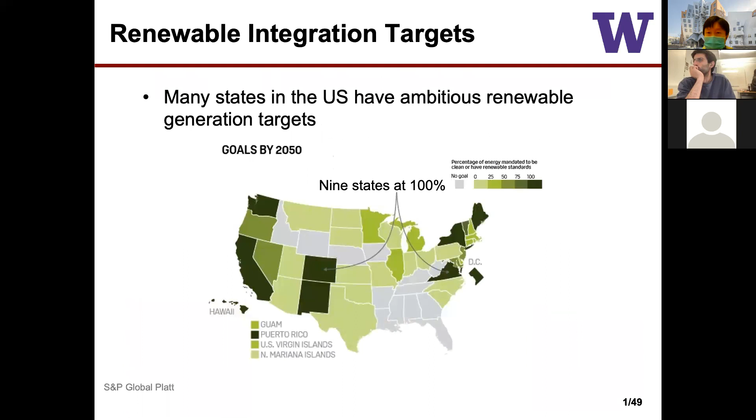Today I'll talk about learning for energy systems, especially safe learning for energy systems. This work is with my students here. As many people in this room and listening on Zoom know, we have pretty ambitious goals about renewable integration.

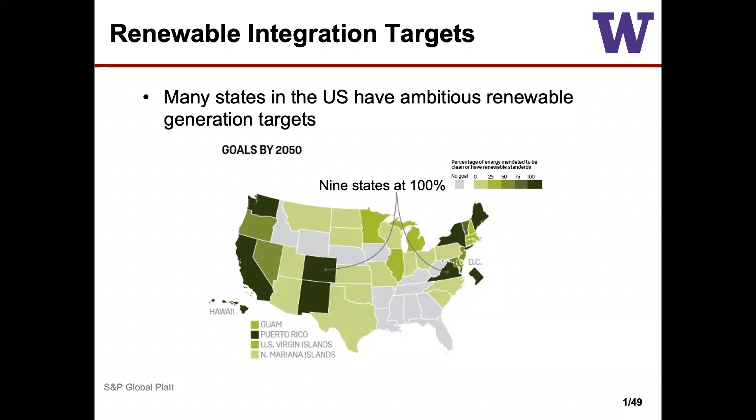Many states are targeting a very large amount of renewable portfolio by 2050, with some trying to get to 100%. To integrate these renewables, we're going from a system with little renewables and a lot of traditional synchronous machines, to a system with much more renewables connected by inverters.

Through the talk, we'll contrast generator-dominant systems versus inverter-dominant systems. The system with more inverters is much cleaner and more sustainable, replacing carbon-intensive generation. But the challenge is that although the generator-dominant system is not very clean, it is easier to control.

For conventional systems, you have about a few hundred generators to worry about, with fairly large mechanical and rotating inertia, so you don't have that many things to think about. Whereas when you move to an inverter-dominant system, you go from a few hundred generators to millions of things you have to think about, and each of them is much smaller. So from a control and stability point of view, it's quite a bit more challenging.

The good thing about working with an inverter-dominant grid is that it gives you a lot of control capability. Inverters, being power electronic devices, give us a lot of possibilities to control their behavior, whereas synchronous generators are typically much slower and there's not much you can do to control them. With inverters, there's a lot you can do.

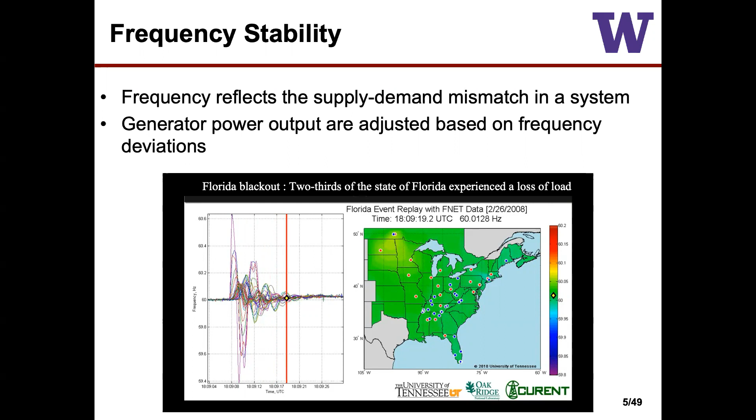If you read FERC's order, it basically says well, if you're renewable, you must provide frequency response. If you want to integrate with the grid, you cannot just act like a load, or a negative load. You have to participate in frequency response if you're an inverter-based device. So the question becomes, how should you participate? FERC tells you that you must provide it, but FERC doesn't tell you how to do it. So we're interested in, if you're an inverter, how should you participate?

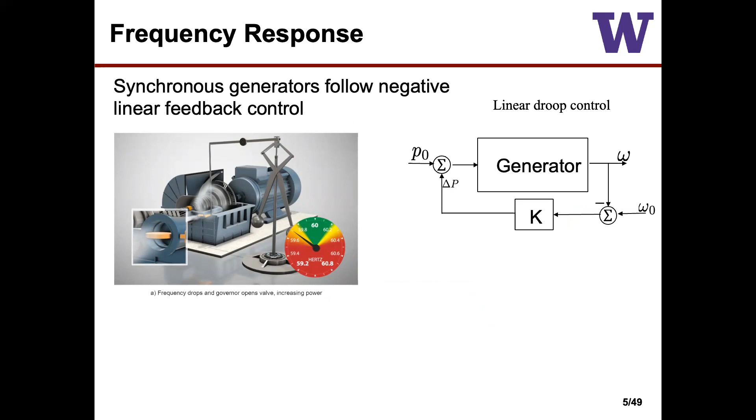For traditional synchronous generators, this is not a big problem. This is a problem that was well studied. What they do is they follow negative linear feedback. You measure your frequency deviation, you go through a linear gain, and you adjust the power output according to the frequency you measure. You control this kind of linear slope. You do a linear droop if you're a synchronous generator.

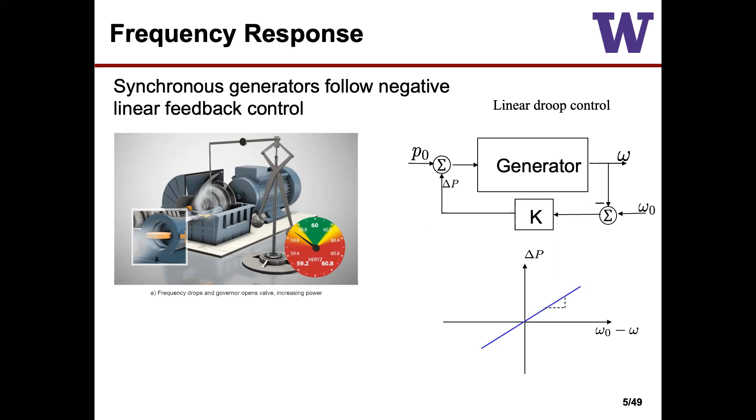Now what do you do if you're an inverter? You don't have this kind of spinning machine anymore. What you do is you have electronics switching at very high frequencies. And if you're told to respond, how should you respond? Whereas for a conventional generator you're quite limited in this control, for inverters there's almost arbitrary choices you can do. You can measure frequency and respond however you want. So this is now a design problem of what response you should put here.

So far, what we've been doing is we look at this and say, well, we know how synchronous generators work, so let's just mimic a synchronous generator. I can do anything I want, so how about I mimic a synchronous generator? Well, is that optimal? Can we do better? This is as if you have a smartphone and you're being asked what do you want to do, and you say, I just want to make calls. So if you have this design capability, can you do something better than a synchronous generator? That's our question. I don't know what curve I should have here. I can do a linear curve, but maybe I can do some other curve that's slightly better, that has better performance.

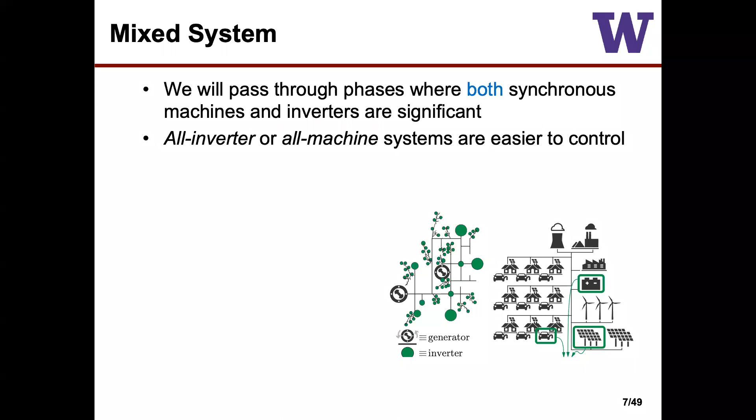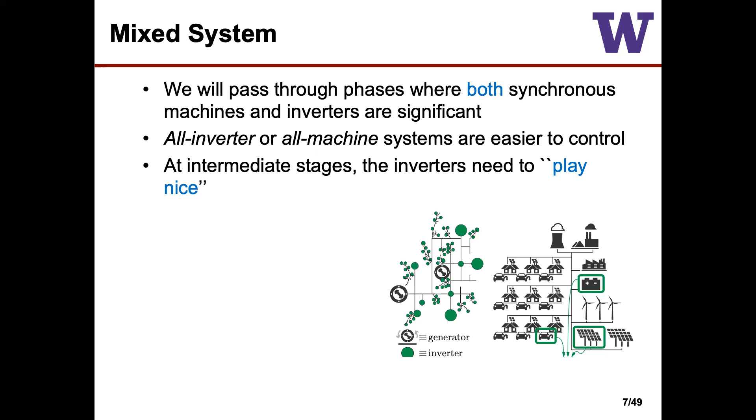One thing to remember is anything you design, the inverters have to play nice with synchronous machines. You cannot assume your system will suddenly go from no renewables to 100% renewables. We have to go through a phase where both are significant. It turns out if you assume everything is inverters, it's easier to control, because you have full design capability. So here, what we want is we want the inverters to play nice. You still have synchronous machines, you have to respect their dynamics. At the same time, you want to design your own feedback to be more optimal in this mixed system. When we talk about systems, think of 50-50%, half inverters, half synchronous machines. So you cannot say there's no constraint. There's still constraints. This kind of system still puts a type of constraint on the controllers you can adopt.

To do this kind of design, we're facing a bunch of challenges. The challenge is, if you're an inverter, you only get your local measurement, you measure your local frequency. There's no explicit communication within the system. You want to control a system that has nonlinear dynamics, we're focused on power flow equations, which are nonlinear equations. So we're doing local control of nonlinear systems. And then what do you want? You want your control effort to be relatively small. You have an inverter with limited power output and limited energy, so you want your control effort to be small, and you also want your frequency deviation to be small. So you're basically trading off control effort versus making the frequency deviation small, and making sure the system eventually converges to equilibrium.

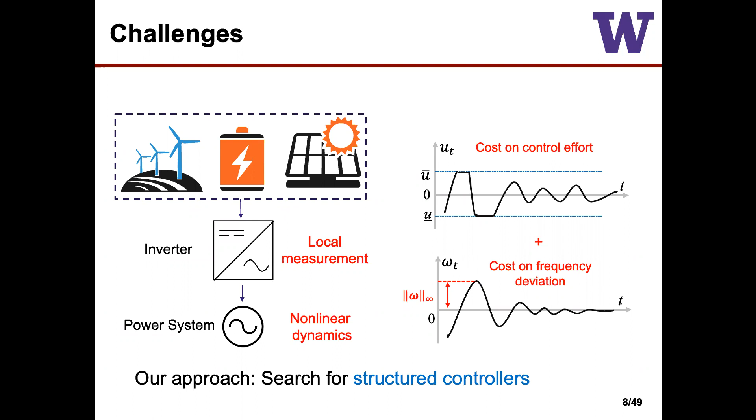Our approach is we want to optimize the controller. We're going to search for structured controllers, the right type of control function we should have on the inverters themselves.

So the outline: we'll talk about how you systematically think about finding the controller. We're going to do learning, but how should you think about which kind of controller to run? What we want is to guarantee system stability. We don't want to trade off optimality versus stability - the system should be stable. Then we can optimize performance on top of that.

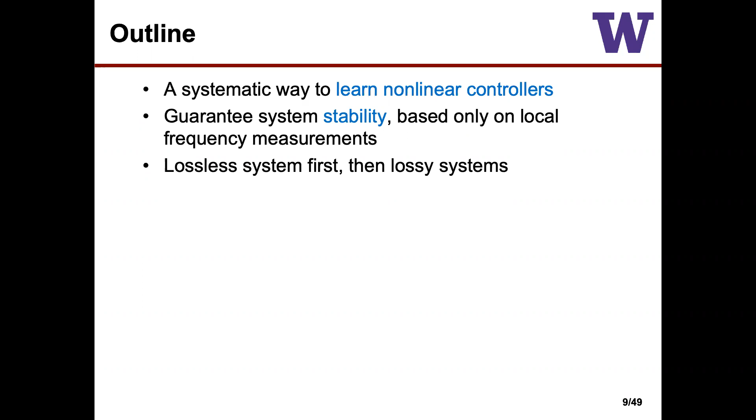So we'll do a lossless system first, then we'll look at the lossy system for simplicity. By lossless, if you look at this power flow equation, we'll assume that B is much larger than G, the standard assumption, and then we have only the sine term left over. So we'll first start with this lossless power flow equation, then circle back to the more full AC power flow equation to look at how stability and learning interface with each other.

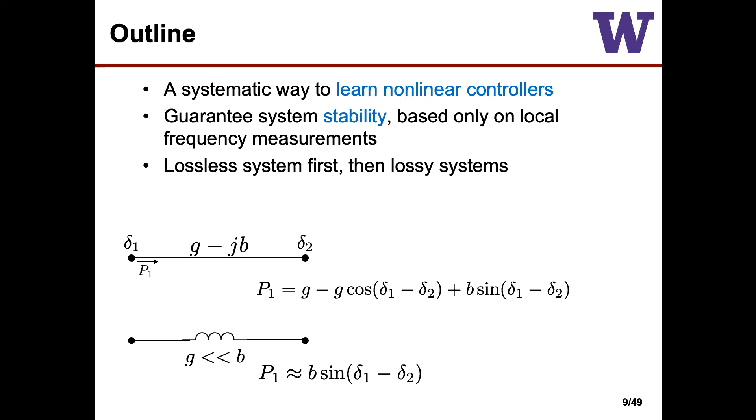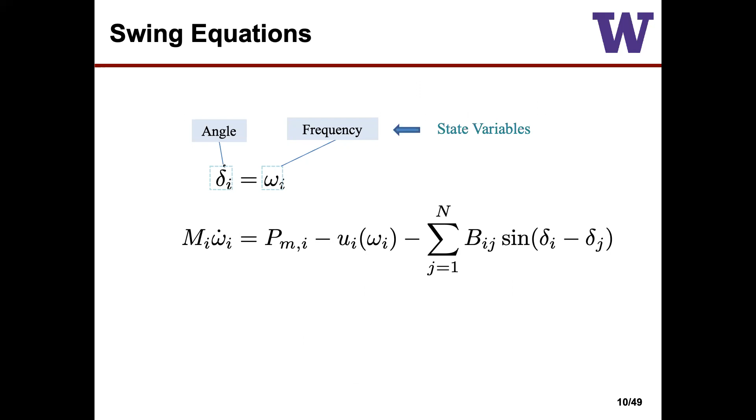I'm sure folks here have pretty much all seen this power flow equation. Just for notation, we have an angle and frequency - the time derivative of the angle is frequency. This is the swing equation: we have some inertia, some power injection, this is power flow, and our goal is to design this controller U.

Think of you're an inverter: you measure your frequency, your local frequency, and you have some feedback to power. So this function U is something you want to design.

So local frequency - they're on the grid side. Think of PLL, phase lock loop, measuring the grid side frequency.

So if you talk about linear droop design, you basically have this as a linear function. When you talk about inverters, the question you ask is, can it be some other function? I don't want linear functions, I want this to be a better function. So what is your goal? How do you measure better or worse? How do you think about optimality for this kind of function?

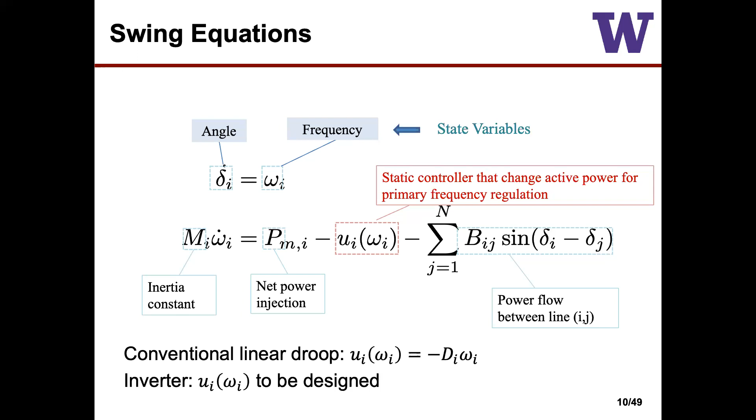The way to look at this, we have things on a graph - some are inverters, some are traditional synchronous machines. They're all linked by this nonlinear power flow. And you want two things to happen: you want all this frequency to synchronize, let's say to 60 Hertz for the US grid, and you want to minimize the control effort you have on this.

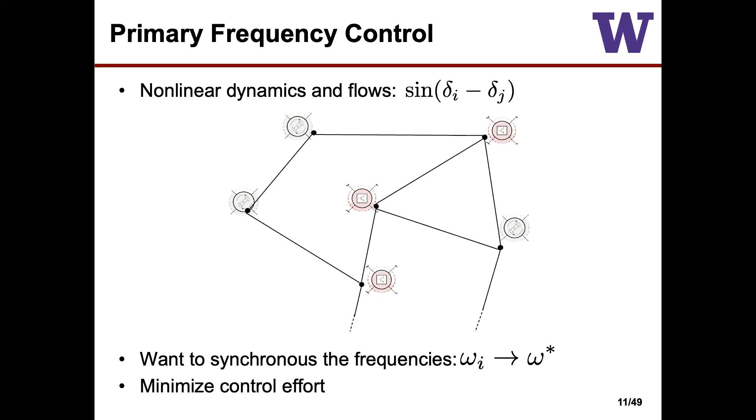So optimality will be measured in terms of a trade-off: I want to minimize the frequency deviation from the nominal setting, plus the control effort. This is a sum between the infinity norm on frequency and the two norm on control effort. Anything that minimizes a weighted sum of these two terms we think is optimal - optimal means this is small and this is small, those two costs are small.

Sorry, should we ask questions? Yeah, you can ask questions. Yeah, go ahead.

Why do you consider that your frequency will converge to the nominal value? This is a discussion I had with Maria - after it was understood, this is a problem of primary frequency control. After that, let's say in the Nordics or in European countries, frequency settles to a steady state which is different from the nominal value.

So in that case, your second norm requires you to carefully design which time frame you choose, because you have steady state frequency variation—it doesn't go to the nominal value. So here you assume that your inverter also plays a role of secondary control and puts back the frequency. Yes, we'll restore the frequency. So basically you are doing two functions: reducing the instantaneous frequency deviation, which is the infinite norm in your case, and putting the frequency back. Yeah, all this process.

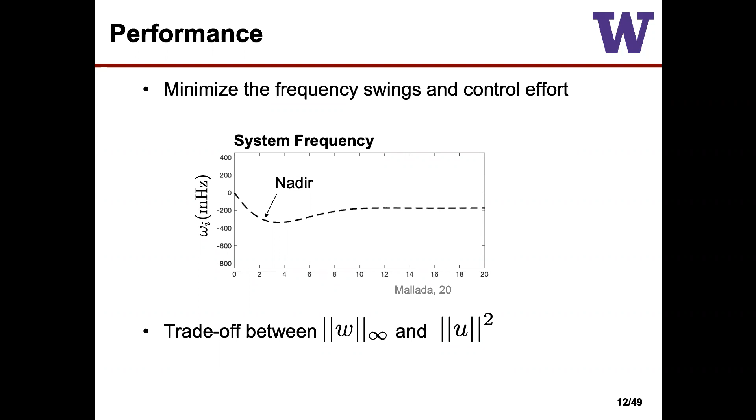Second norm is a good cost if you think about storage—this measures the energy extracted from storage, so you can use second norm. There are better functions, and the thing I want to say is we don't need this to be second norm. Think of this as an example; you can put in whatever function you want for the controller here. We don't require convexity on this cost function actually. There's one nice thing about learning: we don't need this to be convex. So if there's a cost function that's more economic, that makes more economic sense, you can put in that cost function. Think of this as an example, because this is sort of the traditional thing people do in control. But it's a good question—you can replace this with some other function if you want.

So this problem is about optimizing over all static feedback controllers U. This problem is as non-convex as you want it to be—there's nothing convex about it if you want to optimize over U. So it doesn't matter what your cost is; you can put in non-convex cost for this. Even if you restrict U to be a linear function, it's still not convex. Even if you want to say, I want to search over the best linear controllers, it's still a hard problem to do—there's no good way to search over linear controllers. And if you want nonlinear controllers, this is a very hard problem to search over.

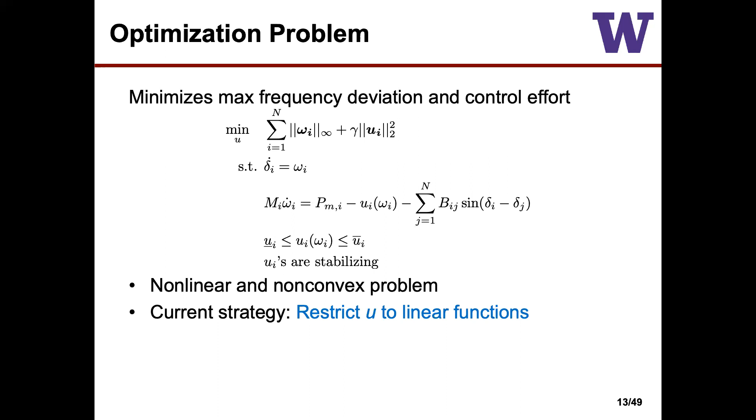So right now, if you look at our approach: okay, let's try learning. I don't know how to search over this, but I do have this problem I can write down, I do know the physical equations, I can simulate this thing forward. So let me just do learning and see if learning learns a reasonable controller for me. Let's just try this and see what happens.

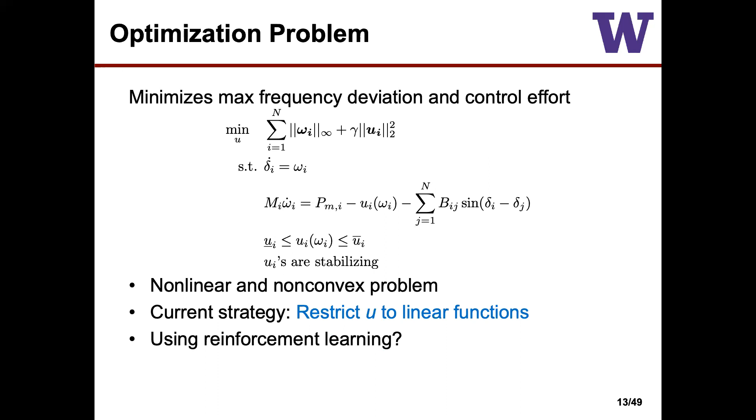All right, so in our work we'll also do learning. But the key thing of the learning we want to do is we want to guarantee the learned controller is stable, so it doesn't blow up the system. We want to guarantee that this learned controller is robust to system topology changes, so you cannot assume you know everything about the system, like the exact equilibrium. We want to make it fairly robust. It turns out you can do this if you look at things like Lyapunov functions and passivity. The rest of the talk will walk through how to look at stability from Lyapunov functions and passivity to come up with the right class of neural network-based controllers—what is the right class you should search over when you do learning.

But before doing this, we can ask the question: do we need any of this math? Do I really need to look at Lyapunov functions? Why not just try the simplest things I can do?

Parameterize things, control as a neural network, run RL. Let's see what happens in this case. So I know the power system, I can do time domain simulations, and I can update the weights of this neural network controller using very standard algorithms.

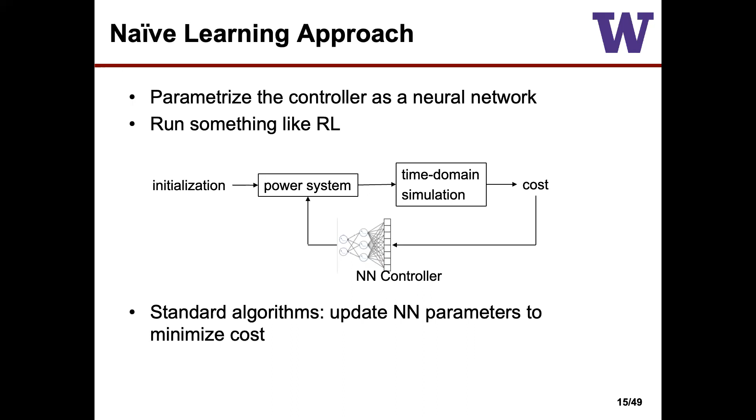You can code this thing up in like a week or so and see what happens. You try 39 bus, you run this, and you say, hey, this is pretty good, actually. My best neural network controller is a lot better than the best linear one I have. I do a lot better in training, so you're very happy with this performance.

But the bad thing is, you can put this into testing and you get some controller like this. Who knows why this thing makes sense? But I'll tell you, this is the best one I can get. Okay, so let's see what happens during testing.

That's the biggest difference between testing and training you can see. This thing does not generalize at all. You can train all you want, the training performance is quite good, but when you actually put it in the system and do testing, this is where the system blows up. So that's why stability is important.

Because the system is not linear, it's very large, and whenever doing learning you only look at a finite number of trajectories. So there will be some perturbation that kicks your system in the wrong way, and it blows up, and you try to convince any system operator to use your controller. Just look at this, and they will never use your controller. So naive learning is not very good. You don't want to naively learn any controller you want.

Sorry? Oh, so there's a lot of buses, so they're just coding different buses in the system. Yeah, generators, right? So some are blowing up, some are not blowing up. That's for weird behaviors in the system.

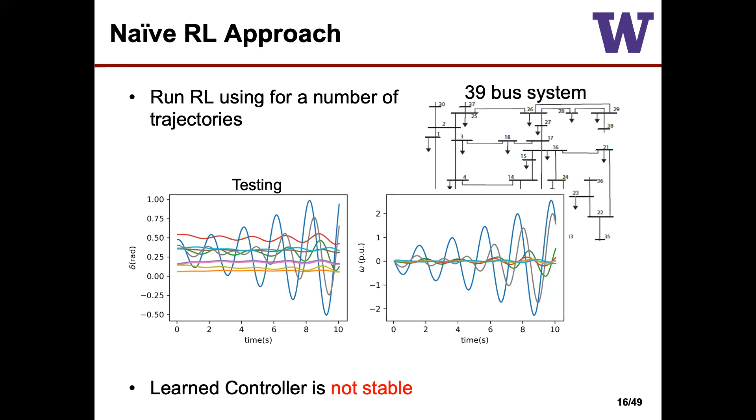Right, this is unstable behavior. So if you look at this idea, you cannot search over all controllers. What RL does is let you search over every possible network. You really want to search over the controllers that do two things: one, I need to have an equilibrium at the end of the day, and I should converge to equilibrium. That's what a stable controller means. Those two conditions should be satisfied when you learn your controller.

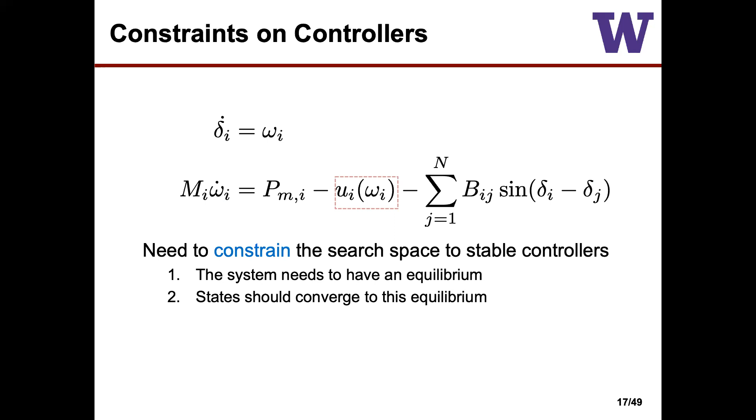So the question is, how do you make these two statements into an algebraic constraint I can put on this? Okay, so that's our goal. How do you get a computer to enforce these two things for you?

So if you look at this optimization problem, the question is, I have this constraint - you should be stabilizing. What do you do for the network? Because our goal is to put this sort of very global and general constraint into something with algebraic equations which I can work with. I can constrain the controller to satisfy that constraint. So how do we do that?

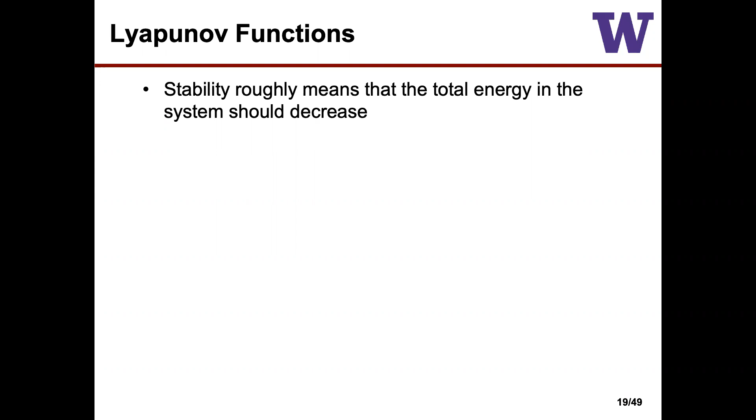Well, so this is where we have to look at Lyapunov functions. It's a nonlinear system, so let's first look at Lyapunov functions. Lyapunov functions measure the stability of the system by looking at the energy functions in the system. And very quickly, you have a dynamical system.

You want a function V - think of this as energy. You want this to be positive when you're not at equilibrium, and you want the derivative to be smaller than zero - you want it to decrease. This means you want to dissipate energy until you get to the equilibrium, then you stay at equilibrium. So if you have this function, the system is stable. Right, if this thing exists, everything goes to equilibrium - there's nowhere for the energy to go.

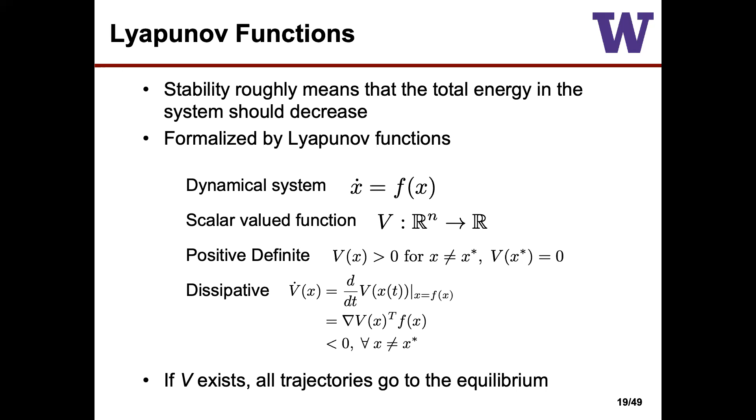Of course, the theory is nice. The question I always ask is, how do you find this Lyapunov function? For linear systems, it's not too bad—you can find a Lyapunov function by solving a convex problem. For nonlinear systems, you're basically on your own. This is a very hard problem typically, searching for a Lyapunov function.

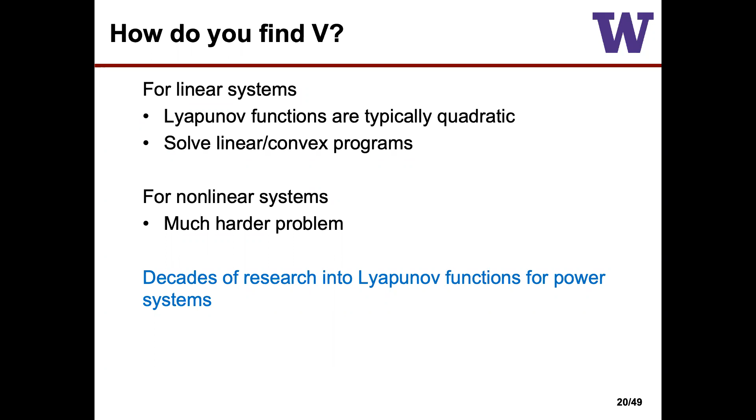The good thing is we're not working with an arbitrary nonlinear system. We're working in power systems, where folks have been looking at this for decades, at least. So what function do I have? Well, if you go back to the energy function for the swing equations, this is a very well-known energy function.

So how does learning come in? How does this help us learn a structured controller when we know this Lyapunov function? Well, let's say we still want to use this function. Does it put any kind of useful constraints on the controllers? Let's look at it.

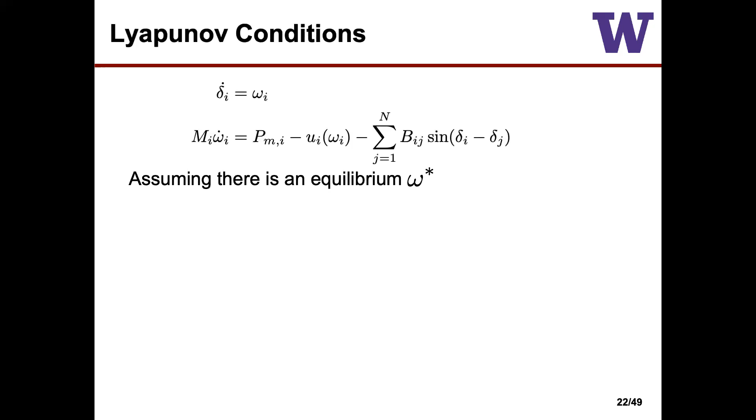So let's assume there's an equilibrium—we'll prove this later, but let's say there's some equilibrium when I put in this controller. So how do I make sure the energy decreases as I go to this equilibrium? You basically write out the Lyapunov function with this U. You go to your Lyapunov function, write out all those conditions with this U inside the dynamics of the system.

One thing is you want this to be zero at equilibrium. This will tell you U at zero must be zero—basically, the frequency is not changing, do nothing. This is a very simple, intuitive idea. Then the dissipative factor, this V dot must be less than zero, which turns out to give you this algebraic condition. You need to satisfy this condition for this Lyapunov function to have decreasing energy, for the derivative to be negative.

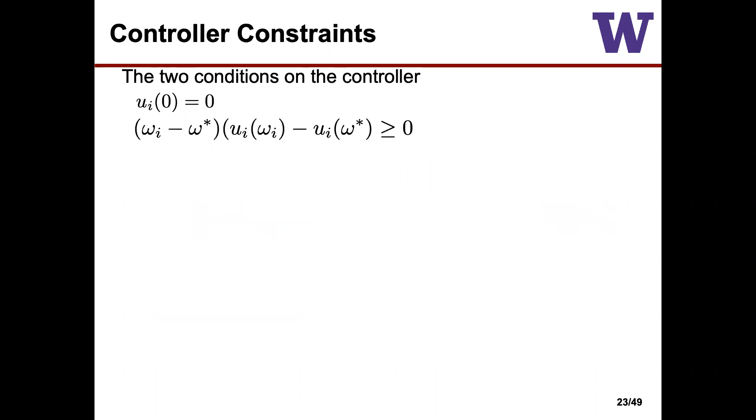So at least we turn the stability constraints into some algebraic constraints we can look at. And if you stare at these two equations for a few minutes, you'll quickly realize this is actually a very simple constraint you can enforce. This is sort of a trivial form—I want this thing to happen. You look at it for a while, and these are the only class of functions you get.

What this says is, if this goes to zero, this function has to cross the origin. And this basically says your function is increasing—so if you're larger than equilibrium, you have to be larger than equilibrium; if smaller, this thing has to fall. So this is the class of functions you have. We're changing a stability constraint into an algebraic constraint by restricting your curves to be in this form—they have to be in this form for us to work.

And it turns out this will guarantee you actually have an equilibrium. You can prove this later. Go ahead, yeah, go ahead.

So here is the positive slope—if the frequency is very small, you still want to do a sort of larger-magnitude action. Oh, so the sign is the nominal minus the frequency. Yeah, so the sign is the nominal minus.

So we can think of this as—okay, right, so this is the functional form, basically. Don't do RL for an arbitrary class of functions—use RL to search over this class.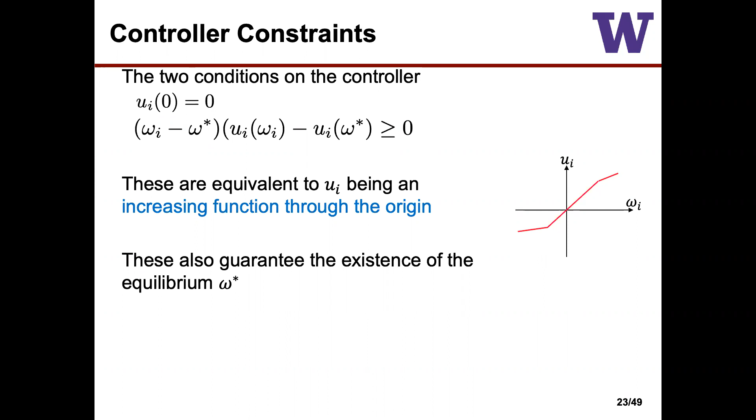So here, let's think—this is the class of functions you want to optimize. The theorem basically says that if you give me this frequency dynamics, if your controller satisfies the monotonic increasing function through the origin, you're guaranteed to reach it. There is a unique equilibrium in a pretty big region, and you're guaranteed to reach it.

The proof is actually not very hard, so I won't write it here, but it's quite quick, it doesn't take that long. This monotonicity basically gives you an omega star, an equilibrium. Lyapunov arguments tell you your energy decreases. The bit is you have to use LaSalle's principle to really get to the unique equilibrium—that's the non-trivial part of the proof we used there.

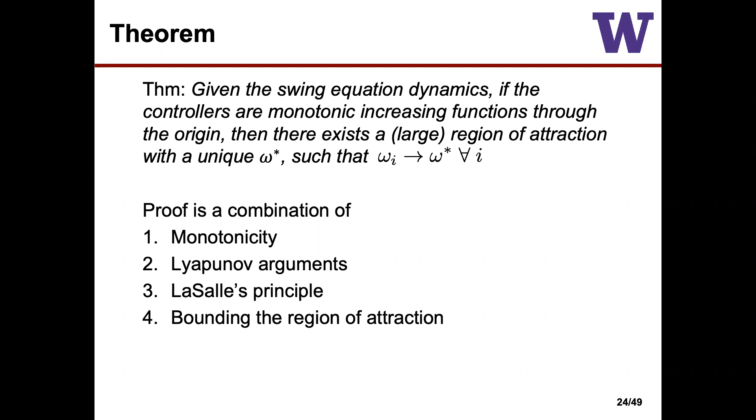And then what we can do is bound the region of attraction, so we can tell you if you start within this region, for sure you'll reach the equilibrium. Okay, so that's the proof.

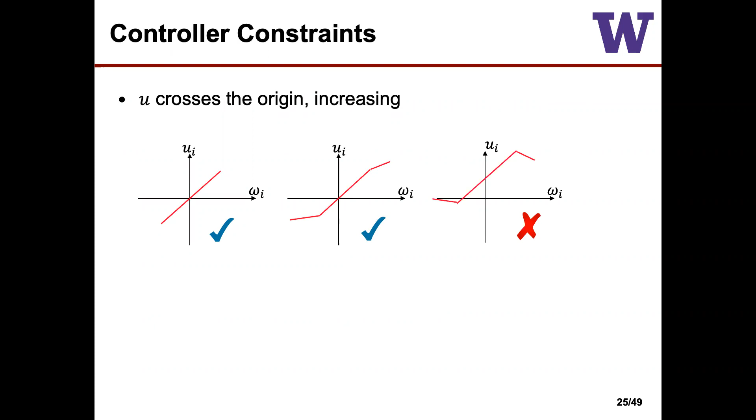If you look at the controllers, basically what it says is linear is fine. Let's go back to linear—does linear work? Well, linear satisfies this condition, it's perfectly fine. This sort of thing is also okay, it'll stabilize the system. This is not okay—this thing will not stabilize the system, it will try to blow it up. Okay, so that's why the naive RL doesn't work.

And so it learns something like this, and it will blow up the system. And you can clip the output to satisfy power constraints—you have constraints, you can do that.

So to recap what we've done: we're taking a bunch of stabilizing constraints and made it into an algebraic constraint on each of the local controllers. As long as each controller satisfies our increasing and monotone property, we're guaranteed to satisfy this constraint. Then I can use RL just to minimize this problem, with this cost function or whatever cost function you want, because I know the system will be stable.

I don't have that—yeah, go ahead. Just to be clear—are you trying to find the best slope for your inverter? No. What do you assume is your controller in your inverter base? So your inverter can implement something that's not just that.

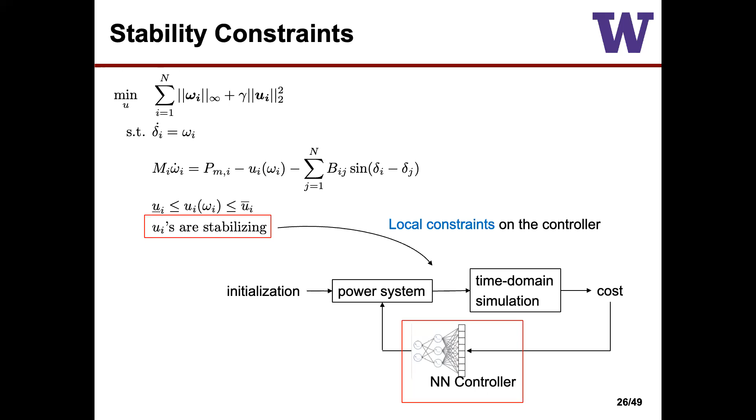So the question is, are we just optimizing over the slope? We're not, right—we're allowing inverters to do something like this for many pieces. I mean, usually, at least in areas where I work, this is a steady state curve. Is this a steady state? Steady state curve—this is a static controller.

So how does it reflect some dynamics? What happens in between? Because if you're trying to reach the nominal frequency, you need some integrator that will do the job—you cannot just rely on the proportional gain. So where do we see the integrator part? Oh, where do we see the integrator part? Okay, yeah, that's a good question.

So you can have this in an integrator loop—you can put this in, create another variable and take that to be an integral control. Is that the case here? So you can put that in, but for now, let's think of this as static controllers. Let's think of this as static controllers, yeah, right, like this—static control, but right.

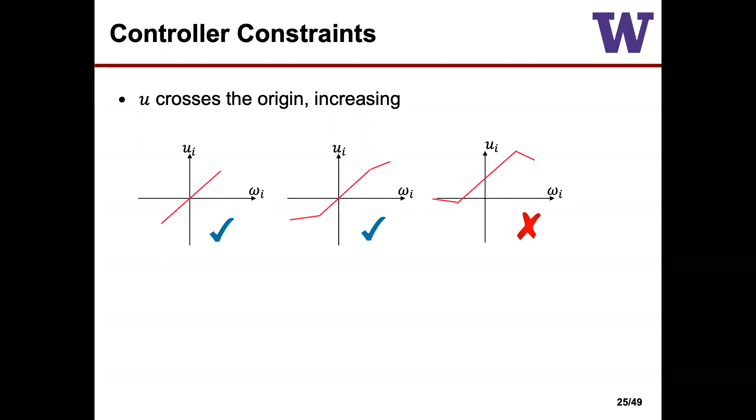Yeah, still works. It's not in this talk, but I can talk after. When you have integral control, this still works. Yeah, still works, that's the same constraint, actually.

Okay, so this kind of constraint, right? So the question is, if you have a neural network, how do you make sure the function looks like this? So you have to put some constraint on the neural network to make sure you stay within this type of function. To do this, we break it up into two parts: an increasing part, a positive part, a negative part.

How to deal with one part is actually very easy with neural networks. Think of building a neural network by stacking up ReLU layers, using ReLU activation functions. What's a ReLU? It's just this kind of thing. So how do you build something that goes across the origin and is increasing? You just keep stacking ReLU pieces like this. This is one line of code in your code that will make sure you follow this type of curve. Simply stack ReLUs up, make sure your parameters are all positive, and you're done.

So by design, this enforces your controllers to be in this form. We don't need to do regularization, we don't need any of that. This is an explicit construction of the controllers in this form.

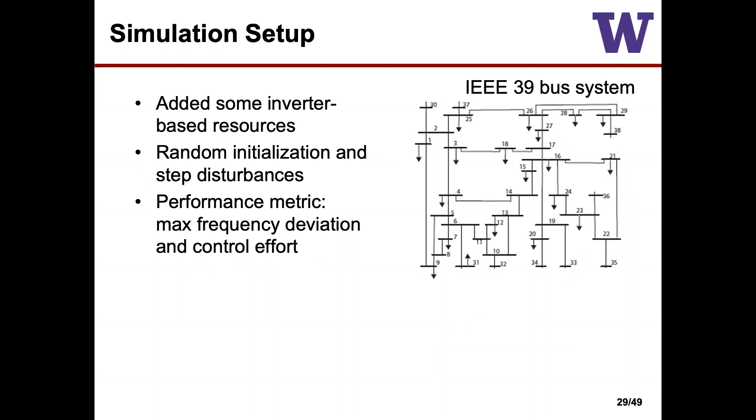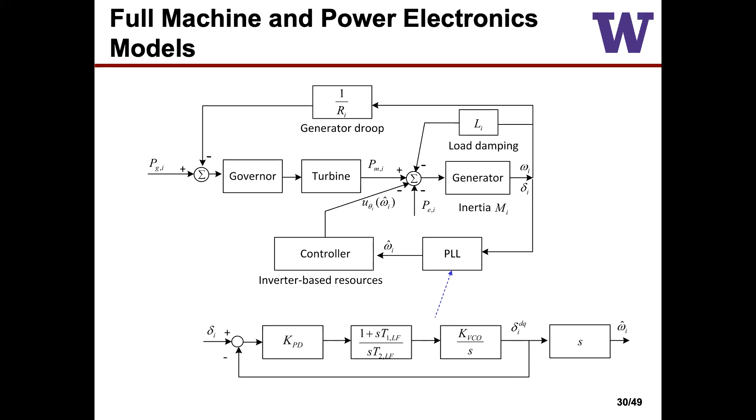Right, so let's see some simulations. Here we again take the 39 bus system, we add some inverter-based resources, and let's see what happens to the system. To be clear, we're going to simulate with all the dynamics we can find. This will have not just a classical second-order swing equation, we're going to put in this sixth-order machine model. And to make sure we don't assume too ideal power electronics, we're going to put in the entire PLL into the simulation. So we're going to put everything in the simulation and see how it does.

Right, so the cost function is the old one we have, where you minimize the infinity norm on frequency deviation, plus a weighted term for the control effort. This is for a particular choice of the weight on the cost. It's not linear, it's quadratic in the control effort, but the frequency part is the infinity norm, so it's not convex in the controller.

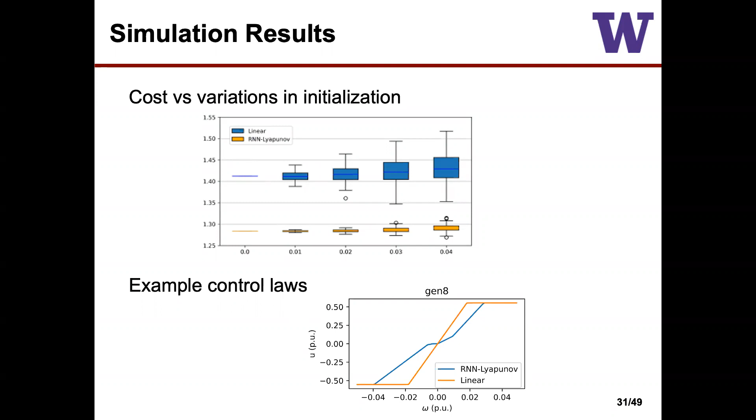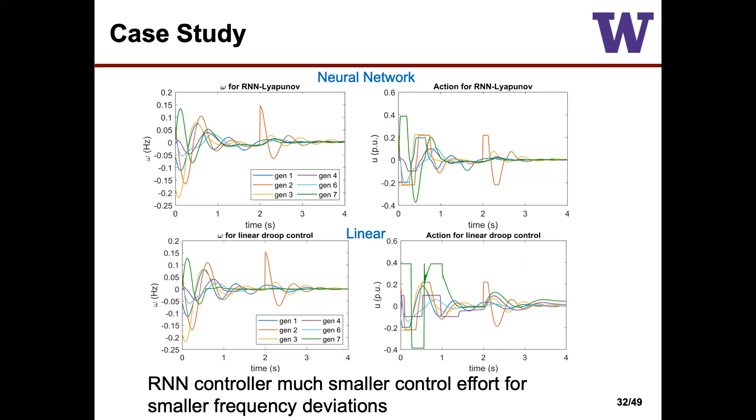So that is, I think, I did the graph myself several times with some nominal control or something. Then you show it to them, and they say, 'Well, it doesn't pass.' You can tune all this code.

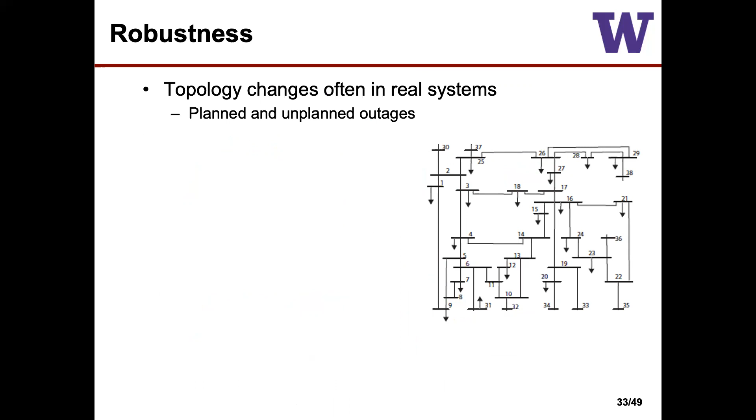So here I want to show sort of robustness to topology changes. What often happens, you have these sort of planned and unplanned outages. So let's say you train your controller for this nominal network, then suddenly you have two unplanned outages that take out 2 of your lines. What happens? Well, we're fairly robust to that, actually. This is a pretty big step we put in here, and it settles down after a while. Then you have a line outage here, and it settles down pretty quickly.

So when we're training the controllers, I did not see this line outage - this is entirely in the testing setting. The different lines shown are the different generators, with different colors showing different frequencies.

So when you have a step disturbance, initially some generators go above 0 hertz, and after less than 1 second, some of them go below. How do you explain that? It seems like there is no PSS in the system, it's very weak.

We're putting a pretty large step disturbance actually - this is a line fault. So this is when we start the system, we're putting a huge step. It seems so unusual though.

Usually frequencies will follow the center of inertia behavior, so after a step disturbance, at least the propagation of all frequency will be in one direction, and they will oscillate again. Not necessarily - that depends on how you start the system and what kind of stuff you put in.

For example, the way we create this is you have a step going up at this bus, and a step going down at this bus, with all this kind of things, and we want to see whether this will stabilize. It's a step disturbance at the same time, for all the buses.

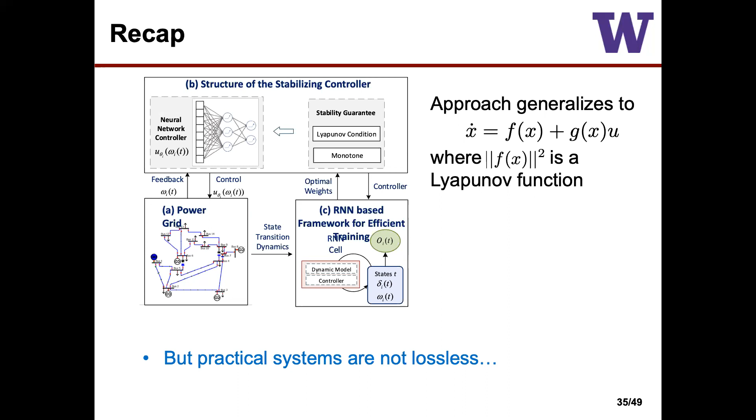But the interesting case I've been talking to you about is a lossless system, but real systems are not lossless. They may have small losses, but definitely the loss is not zero. So if you look at the power flow again, you have a lossy term in there. The problem with those energy functions is they're very brittle to this lossy term.

You may think, well, if the losses are small, a lossy system is simply a perturbation around the lossless system. That's not how this Lyapunov function works. They rely on exact cancellation of all these lossy terms. So if you have a very small loss term, suddenly your Lyapunov function, there's no quote unquote easy energy function anymore.

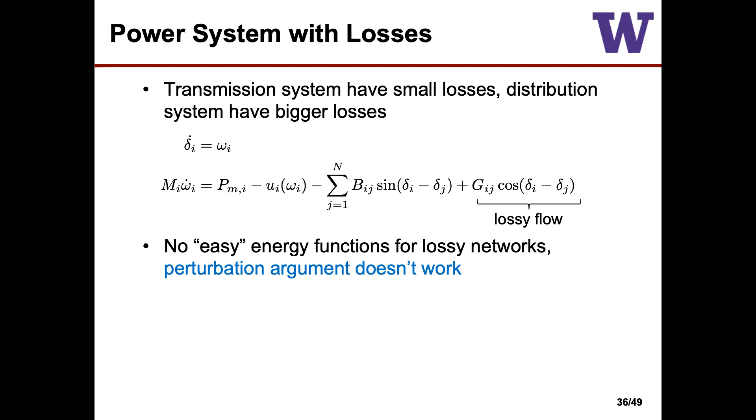And the question is, does your theory survive? We've been talking about the theory, you got a nice condition for the controller and so on, but you don't want to be stuck designing only for this kind of very idealized setting. What happens when I have small losses?

Some people thought, well, if my old Lyapunov function doesn't work, then maybe I shouldn't use this old Lyapunov function anymore, maybe I should learn a Lyapunov function. So since I have these conditions anyway, I can parameterize the Lyapunov function using a neural network, just trying to satisfy these conditions. The challenge is it's very, very hard to verify that what you learn is actually a Lyapunov function. How do you know these conditions hold for every point in your region? There are infinite points you'd have to test. You may have to use something like SAT solvers, and that doesn't scale, at least in our experience, to anything beyond 4 buses.

SAT solvers don't scale. A lot of times when you learn these things using learning, you're very much dependent on knowing where the equilibrium is. But as we saw, the whole point is we have renewables in the system, so the equilibrium gets kicked around all the time, right?

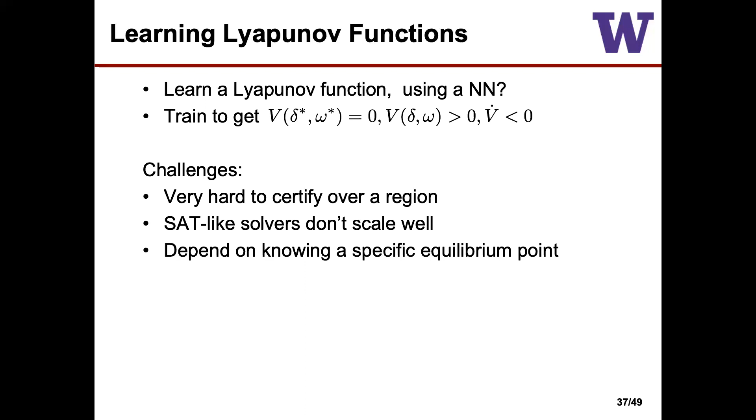I want something independent of knowing a specific equilibrium. So I want to extend our method to lossy cases. The idea is I want a gradual transition, not something that works for lossless but completely falls apart for lossy. As we have more losses, it's harder to control, so we want a graceful transition that works for a large range of equilibrium points and scales to larger systems.

Turns out that's not quite how the math works. So here we'll make use of this equilibrium-independent passivity idea, EIP. This allows you to get a very graceful transition—it's not a 0-1 thing anymore.

The idea with passivity: think of a system with some input going in and some output coming out. Passivity at a high level means I need a large input to get a large output. There are mathematical definitions, but think of it this way. If the system is passive, then to blow it up, the input has to be large. So I can make the input small and the system doesn't blow up.

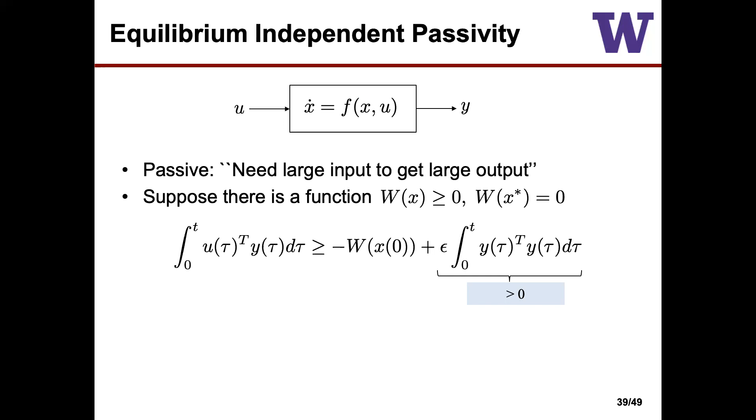The math definition looks at the following: think of this term as always positive, as the energy built up in my system. This has to be upper bounded by the energy put into the system—that's what passivity means. If I can have this bound, my system is passive. The good thing about passivity is it allows you to build a Lyapunov function for analyzing subsystems. If you can make sure every part is passive and link them together, you get a Lyapunov function.

For example, think of a 2-bus system. How do we break it up? One bus with angle and frequency dynamics, some transmission line, another bus with angle and frequency dynamics. We can analyze this part by part, then put things back together to construct a Lyapunov function. This boils down to looking at each component and their interconnection.

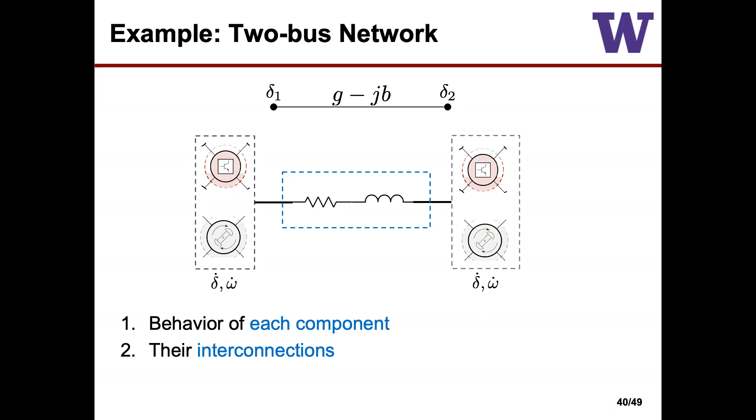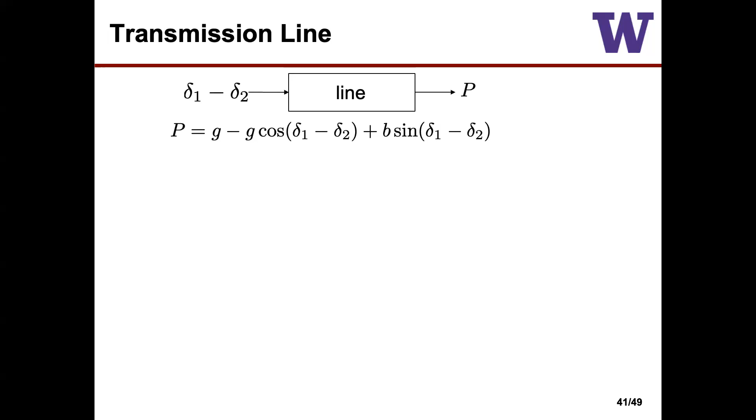To look at components, let's look at the loss, because losses come on the lines, and that's the part we want to deal with for this line. Our input to the line is the angle difference, and the output is the active power coming out of the line. This doesn't have dynamics, so it's called a memoryless system.

Passivity is actually pretty easy here—it comes down to this increasing idea. If the output is increasing in the input, the system is strictly passive, that's all you need. Now let's see why a lossless system is simple: this is the curve from input to output, and it's increasing from minus pi over 2 to pi over 2. That's why the Lyapunov function we had from last time works for this range.

They satisfy this passivity criteria. Now if you put in a lossy system, what happens? Your range shrinks, because instead of a sine curve, you have a cosine plus sine curve. So it's not increasing from minus pi over 2 to pi over 2 anymore—you get a smaller range. But depending on the G and B in the system, you can explicitly bound the range where this curve is increasing. So as you add more losses, you just get a smaller region.

Our theory works for the region where this curve is increasing. Depending on your loss, it'll just be a smaller region, but it still works for the entire region—we don't have to check equilibrium by equilibrium, we can directly check a region. This is again quite a graceful transition: if losses are small, you recover the lossless case; if they're large, you squeeze the region a bit more.

That reminds me of Kostya and Long's work on the Lyapunov function family—it also requires that. Yeah, this kind of problem comes up quite a bit.

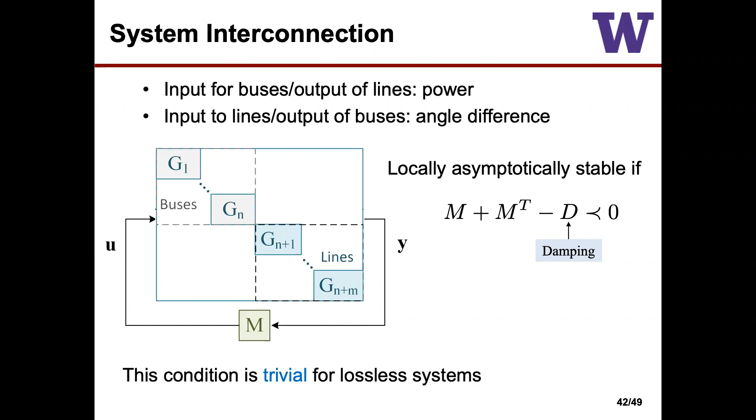And why is lossless easy? Well, for lossless systems, this thing is satisfied trivially. Why do you satisfy this for lossless systems trivially? Because for lossless systems, the power you send in from each end cancels. Sine is an odd function, they cancel each other. So what that implies is your interconnection matrix is so-called skew symmetric. This M plus M transpose will be exactly 0. Then what does stabilize your system?

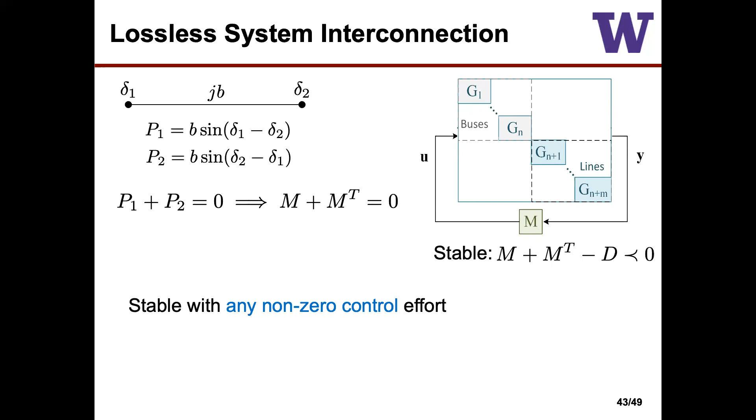Well, any non-trivial amount of control will stabilize your system. So for the lossless system, you just need some positive control effort, and you eventually will come back to equilibrium. So for lossless, that's the idea.

If you have a lossy system, what happens is you no longer have this skew symmetry. When they add, they don't cancel. So now you have two parts in this interconnection: a skew symmetric part, that's nice, and a sparse part that picks up this summation of losses. So you no longer have a trivial control effort. You actually have a lower bound on the control effort. You have to do a sufficient amount of control for a lossy system for the system to be stable.

The good thing is this is a convex problem. It's a very easy bound to get. And again, this will degrade very gracefully to the lossless case. So this is not a 0-1 thing anymore. It's just basically, you write down your system, depending on how much loss you have, write down this equation and check what control effort you need.

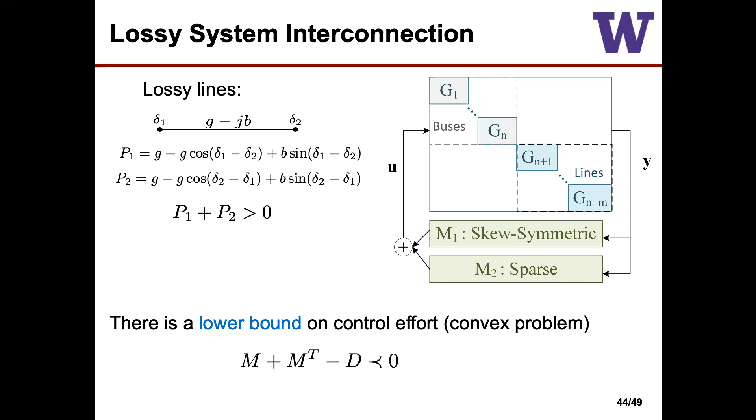So basically, for feasible controllers, if you have a lossless system, you just make sure your controller lives in these two regions, that increasing function lives in these two regions. For a lossy system, you need to be bounded away, you have to have a sufficient amount of control effort. But within these two triangular regions, you can have any function you want.

So when you search over your controllers, let's say using RL to build neural networks for these controllers, all you need to do is lower bound the slope of the ReLU functions.

So the idea was, at least if you look at the equation, for lossless systems those things cancel, there's no energy buildup. So you think resistors will be better for stability? Right, yeah.

Anyway, so you can basically, depending on how lossy it is, get this lower bound on your control effort. Engineer your controllers to stay within these two sectors, then you're fine, and you're guaranteed. And again, the lower bounding is very easy to check. It's a convex problem, you can easily solve it. So we don't need to learn the Lyapunov function or do any sort of SOS solvers, anything else. You solve one problem and get the lower bound. So this is lower bounding the controllers.

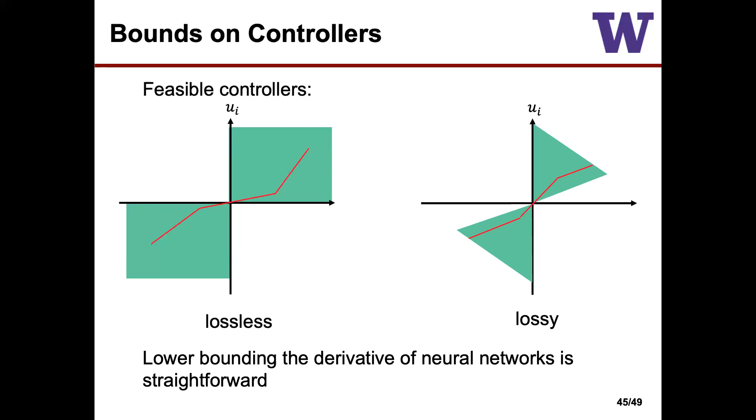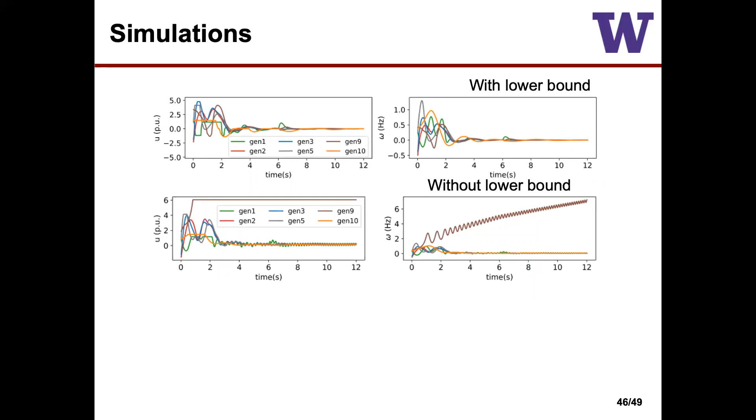So for example, there's a case showing that if you don't have a lower bound, things blow up. You can still train, but things blow up. You do need a lower bound for things to be stable.

So we actually did some experiments. This is Brian, my colleague's lab, Brian Johnson's lab. We're doing some tabletop experiments, cutting things up to make sure this works. So it works for this small setup. There's not that many inverters.

So Brian got more ambitious. We're starting to build a bigger setup, a 100 bus, 50 kilowatt system. There's some 100-something inverters here. Although this thing did trip the building breaker, but we need to be careful how we wire this thing.

No, with FPGA, if you switch fast enough, you don't have to do linear control. We can program it differently. You have an FPGA driving those controllers, so you can implement different ones and don't have to do linear control.

Right, we're assuming that. That's why we want to do actual experiments - there are off-model dynamics, especially at the 10 kilohertz level. That's why we want to do experiments here.